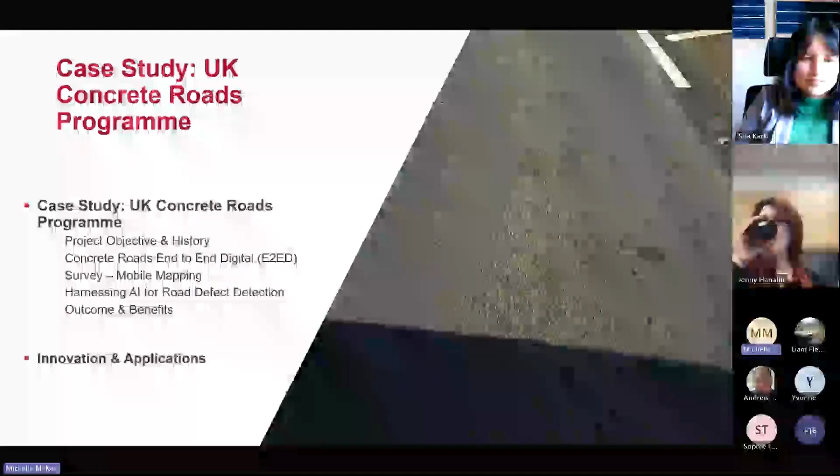So the case study I've chosen for today's presentation is the UK Concrete Roads Programme. We do have a lot of similar projects here in Ireland, but with many projects, we might be in the middle of the project, or customers may not want to share outcomes just yet, or they may want to keep some of the technology and developments in-house, whereas National Highways have kindly let us share the history of this project and their outcomes and the different technologies that they used.

So the UK Concrete Roads Programme, we'll go through a little bit of the objectives, history, the solutions that were used, the method of survey, which is mobile mapping, how we used AI for road defect detection, and the outcome and benefits, and then further innovation and applications with this technology. So this project was carried out on behalf of National Highways. There were a number of other consultants involved, such as AECOM and Mott MacDonald.

Ourselves and Korec were involved on the survey and analysis side of things, and then our sister company, K-Matic, provided the software and data management system and the AI learning for the project also. So a little bit of a background on the project itself.

National Highways manages England's motorway network, and about 4% of their network consists of concrete roads. They were coming towards the end of life. There was 400 million pounds set aside to manage and maintain, carry out repairs on these roads up to 2025. And a key thing for National Highways was to try and identify life extension schemes and reconstruction schemes. There was a huge area of roads that needed to be mapped, managed, analysed.

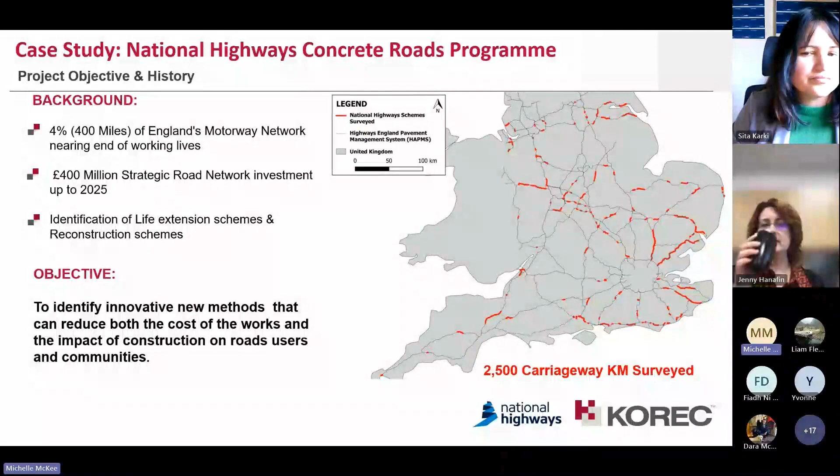They're dangerous carriageways, huge volumes of traffic, and then for reconstruction and maintenance crews to go back out at night time to locate these defects and problem areas in poor visibility conditions, often, due to various factors, works could not be completed, whereby maybe defects couldn't be located, they couldn't be accessed and things like that. So there was a huge amount of money lost through works that could not be completed or abandoned before they were finished.

So National Highways then undertook an evaluation of all of their digital technology to look at the various aspects of the road's life cycle, from the construction of the roads to repair to operation and to maintenance of the network. So they wanted a way to increase the productivity of the roads, increase the productivity of the crews. They wanted to improve safety for both their repair crews and for other road users.

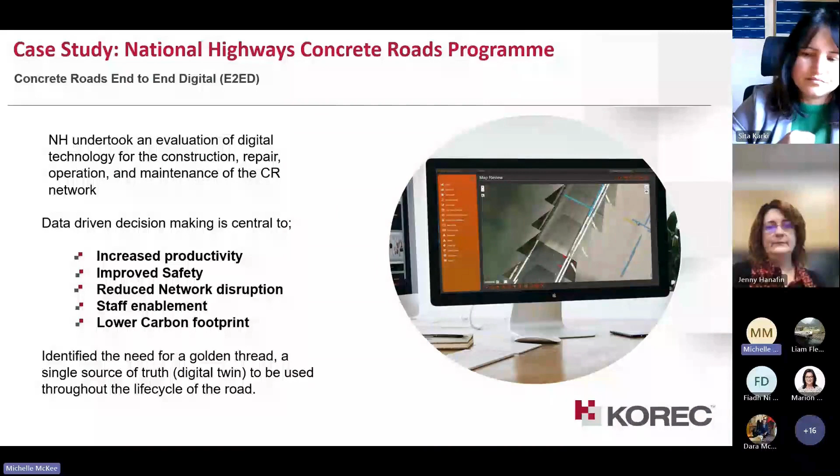They wanted to reduce the disruption to road users when they were carrying out these maintenance and repairs. They wanted staff to be able to make better decisions, and they wanted to lower their carbon footprint. So again, what was identified was the need for a golden thread to link everything together, or the digital twin, as we like to call it these days, and for that to be used throughout the life cycle of the project.

So surveying used to be a very manual process, with crews actually needing to be on the ground to carry out their surveys. Again, on busy roadways, this would require traffic management, would require roads to be closed. So we were looking at ways to automate this process and to capture information remotely. So in comes the mobile mapping system.

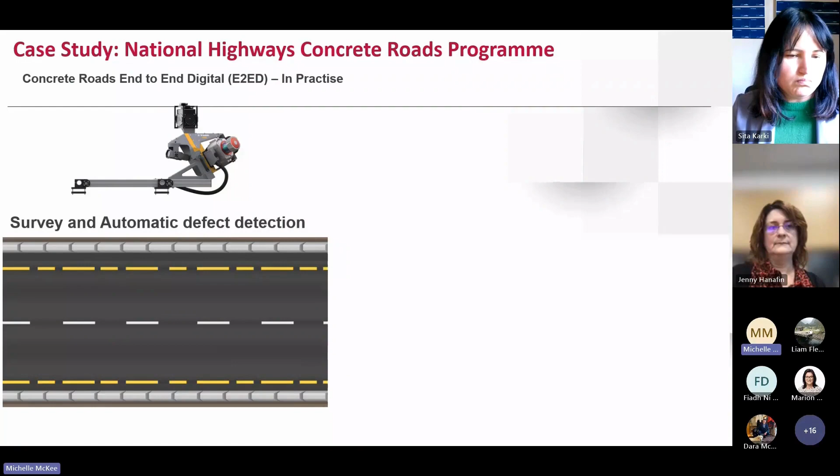So the mobile mapping system was developed whereby we can install this unit on a vehicle, and the vehicle will drive the roads and carriageways at normal driving speed, thus reducing the need for people to actually be on the road network. Again, it captures information, point cloud information, and really high quality imagery.

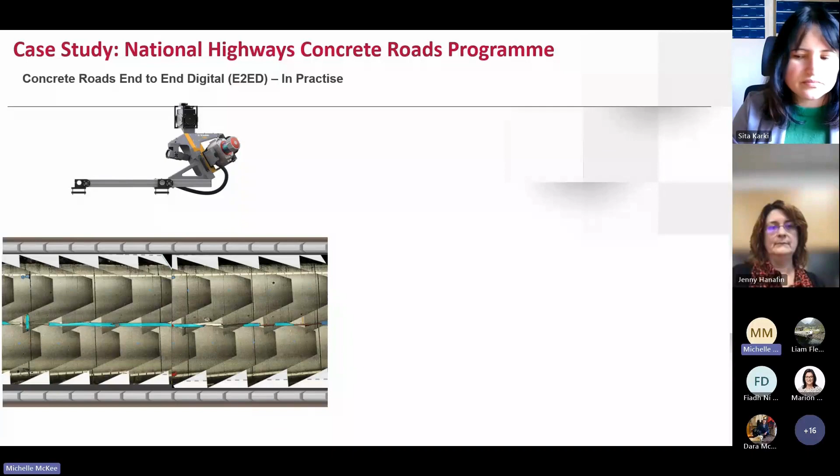Then when this information was captured, the information is not easily managed, I suppose, for many organisations, as traditionally you would have needed specialist software to view the point cloud information and to work with them. Many of these softwares would have been quite expensive, so it would have limited the amount of people that would have had licenses for this. It also might have required some specialist training, which again isn't practical for all of the people who would like to be able to use this information.

So in came the Klearview 360 platform. So this was a platform developed by our sister company, K-Matic, who developed web-based portals to allow you to store large volumes of information. So this meant that immediately you had a place to host this information, and it wasn't stored on National Highways network or servers, and a large number of people could access the information when they needed it, as only your web login was required. So this allowed people to work remotely, to be based all over the UK, and to be able to work with the same data sets all of the time.

So from there, all of the stakeholders could access and use this information to make better decisions in terms of managing the road network. Defects then could be obtained with very precise location data and can be fed back then to repair crews out on site, so that they can navigate to them within a centimetre of the actual location.

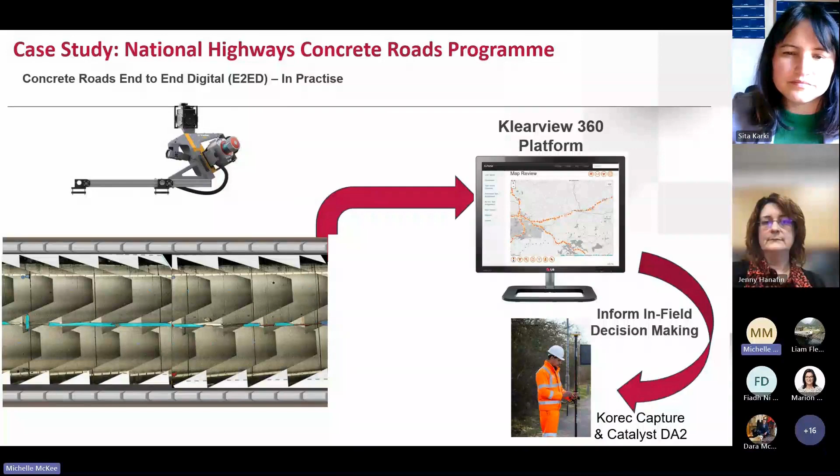This meant that the repair crews now had less abandoned works, and equally when the repair crews carried out defects, they could send the information live from the field back up to the Klearview 360 platform, and straight away any of our project managers or technicians could see what works have been carried out and what works were left to be done.

So a little bit more on the mobile mapping system. On the top of the unit there, you can see the 360-degree Ladybug camera. So this takes images in 360 directions. There's also cameras mounted on the side of the unit, which will capture information maybe lower down in the carriageway at an angle. And then there's a further camera, which is pointed down at the road surface at all times. So that captures really high quality information on the surface of the road.

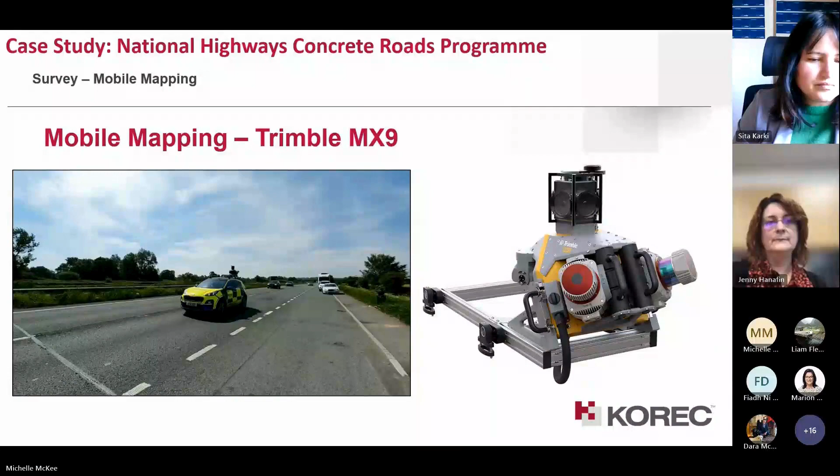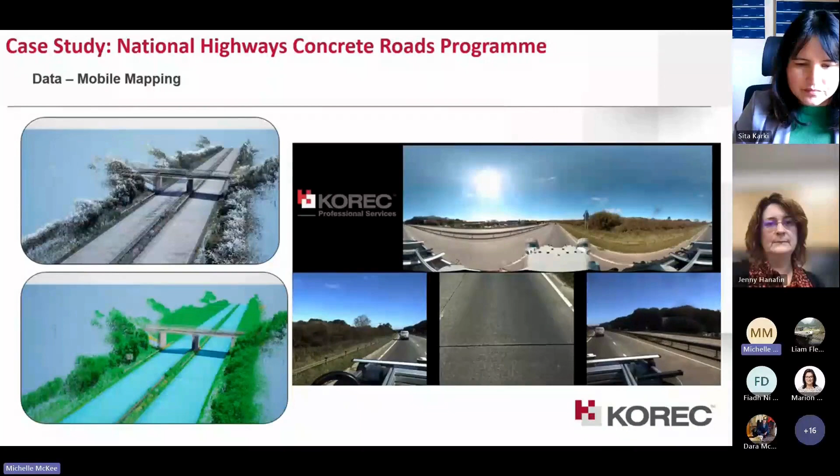Then up on the right hand side, you can see some of the information then from the different cameras. So the one on the top there is the Ladybug camera. The one down on the left will be the kind of side view cameras. And then in the middle, there's a down-facing camera that identifies the defects on the road.

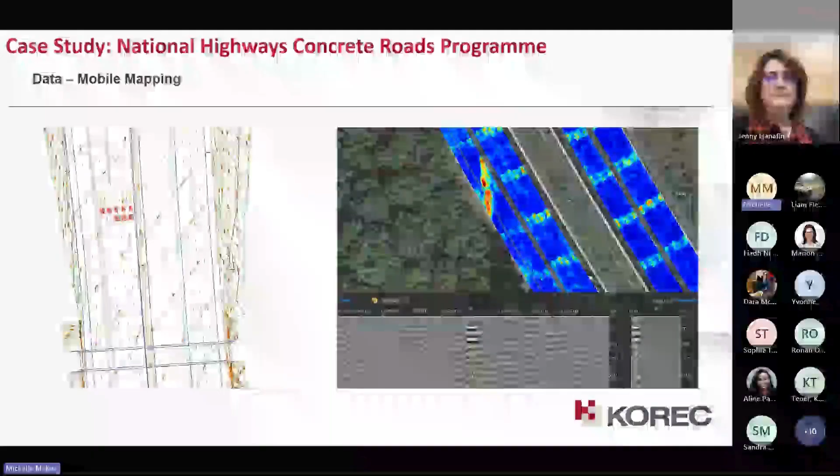So when this information then is looked at in various different softwares, you can see the graphic on the left will show you the point cloud of the survey of the road. But you can overlay that with different things like the design drawing that the consultants may be working with. There on the right-hand side, you can run routines as well that will analyze the surface of the road in detail. So what you're seeing there on the right-hand side is areas where there's a variation in the road level surface. It's probably hard to see, but just on the little graph below, it can give you a cross-section view of the level of the road.

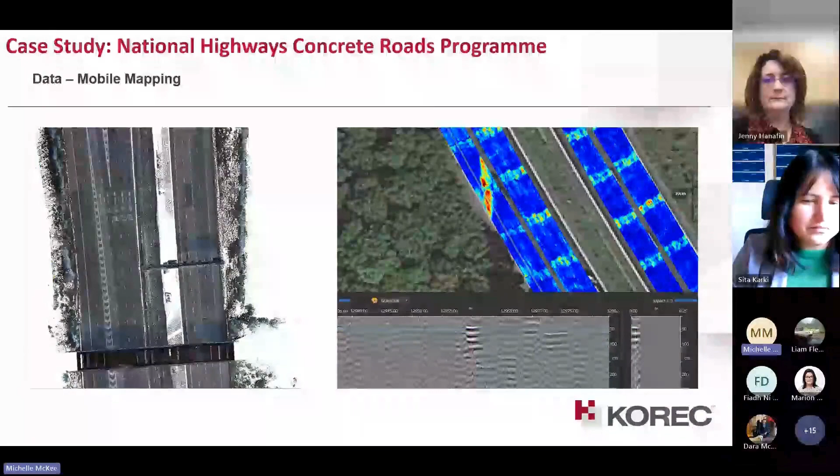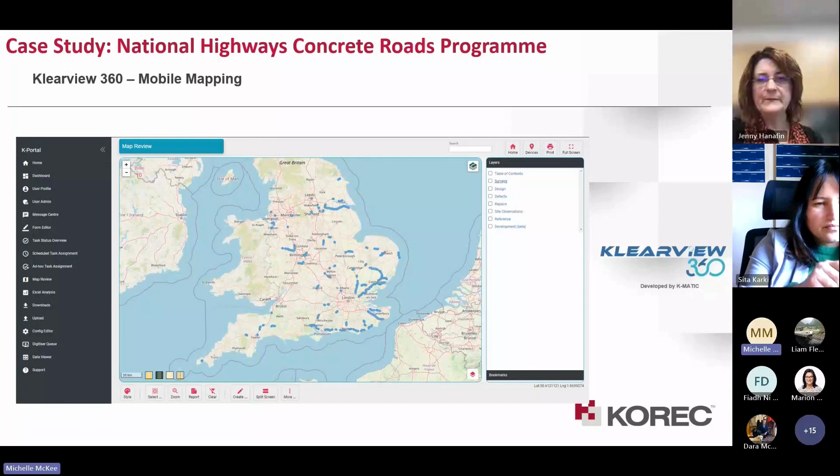Then what does the information look like in the portal? So this will be the standard view in the portal, which allows the different stakeholders to identify different areas which have been surveyed. So for anyone from a GIS background, this looks very familiar, with your ability to switch on and off different layers, to have existing data sets from previous surveys available to be able to overlay on your new surveys.

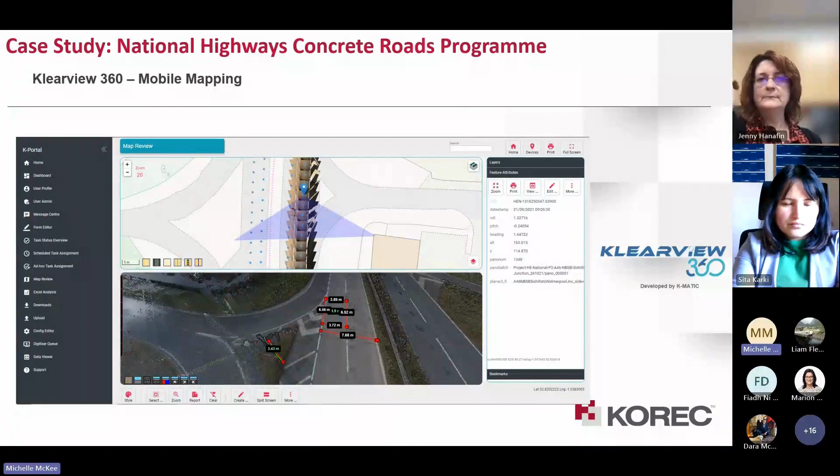So you can see there, the user has taken measurements of the carriageway. It can essentially survey the road remotely. So instead of having to carry out your survey out on site and pick out all of these defects on site, someone who is sitting at their laptop, hundreds or thousands of kilometers away, can actually carry out the road survey. So again, that's just showing you some of the different types of information that can be overlaid in the portal. So then, once defects are identified, they can be drawn up in the portal, and all of these data sets can then be exported, and the location of the defects then sent to the field repair crews.

So for many previous projects, we would have done all of this kind of manually, where you had a person that would sit down and go through hundreds and thousands of kilometers of road data. It was quite a laborious task, so it required a huge amount of manpower hours. So wouldn't it be great if this could be done automatically?

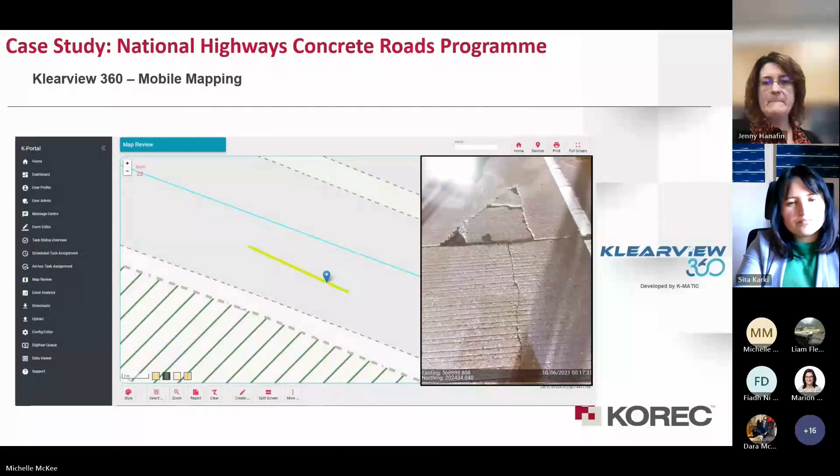So that just gives you an example there of various defects, let's say, that the end user would see as they pan through the photography, and then how they would kind of draft them up within the K-Matic program. So again, you can identify areas on polygons, etc.

So to bring our solution on from this, we kind of moved from manual survey to automated survey methods by using the mobile mapping system. But again, this manual analysis was the thing now that was eating up everyone's time and could delay the project significantly. So again, we needed to find some way of automating this analysis.

And with the developments in machine learning, this suddenly allowed us to do this in great ways. So with our K-Matic team, we have some in-house AI machine learning specialists, and they were able to create an AI tool to actually automate this whole defect analysis. So the AI can be applied to many different types of data. The AI could look at the imagery, it could look at the point clouds, it can use shape and spatial data, and it could also use tabular data.

So the first part in the process was looking at our existing data set and doing some labeling of the data to identify the different defects in this case that we wanted the algorithm to look for. The next part of it then was training the model, which my colleagues in the K-Matic department looked after. Unfortunately, I have no background in this myself.

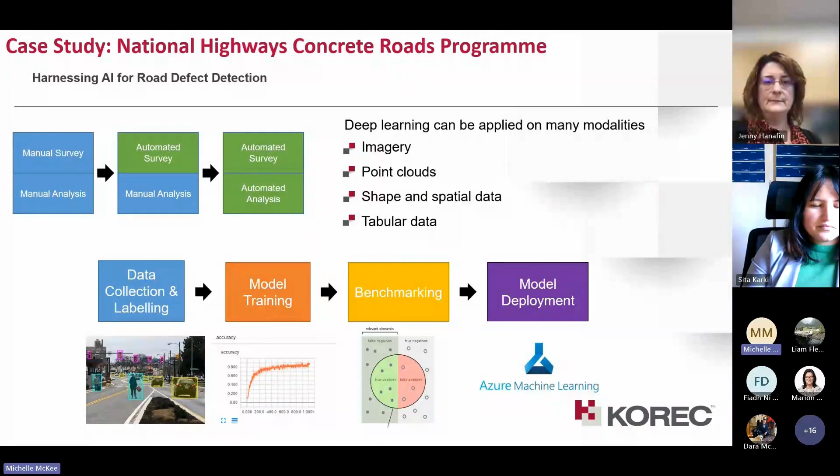After a number of weeks or months, the AI model would have run through a number of benchmarking processes to ensure that the model was identifying defects correctly and up to satisfactory standards. And then once they were happy, the model was deployed within the portal to start carrying out this automatic defect detection. So by using AI, we were getting centimeter accurate analysis of the road surface.

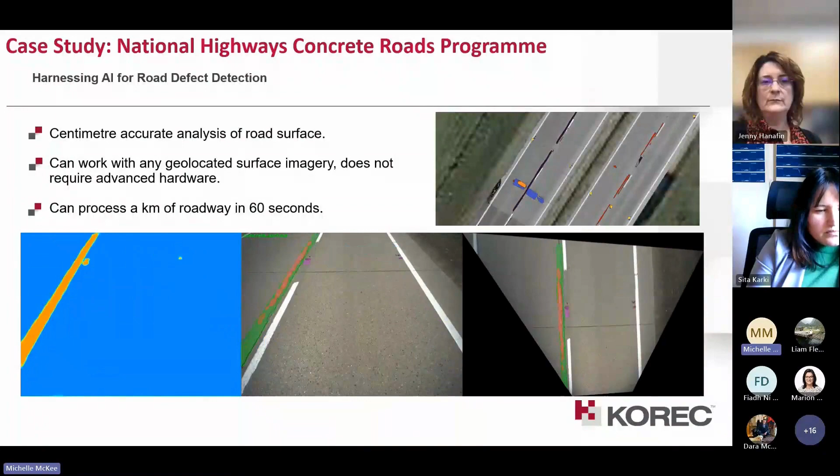And AI can work with any geolocated surface imagery. It doesn't require advanced hardware. It also didn't require us to share our information with anyone. All of this can be done locally within your own project. And the huge benefit to us was that AI can process a kilometre of roadway in 60 seconds. So just looking at the imagery here, these would have been defects that the AI tool actually identified and highlighted, and all of this was done so quickly once the model was well established.

So the outcome and benefits of this project was that it reduced boots on the ground for traditional surveys and inspections. So it allowed us to create digital twins of the roads that can be used by people remotely. So it reduced the cost of works. It also minimised the impact of construction on road users and local communities, which is a huge cost saving to the entire economy, and reduced the risk to workers on site by being able to survey the roads remotely.

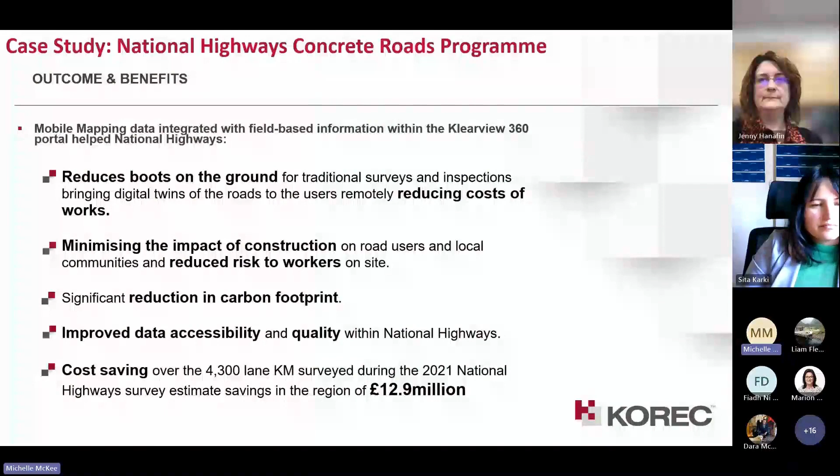There was a significant reduction in the carbon footprint, and it also improved data accessibility and quality within National Highways. We now could have numerous stakeholders able to access the information very easily via the web portal. The cost saving to National Highways, they calculated, was 12.9 million on that particular project. So well worth the investment in developing these new technologies.

In terms of innovation and applications, these kind of solutions are already used in Ireland for fibre, utilities, rail, gully and canopy. There's many people out there that are already using their own bespoke machine learning technology. And what we're looking to do is to empower people with next generation solutions that unlock the potential of geospatial data. And so really with this, there's no limit to where it can go in future. And hopefully we'll have some nice projects we can present on later in the year as well.

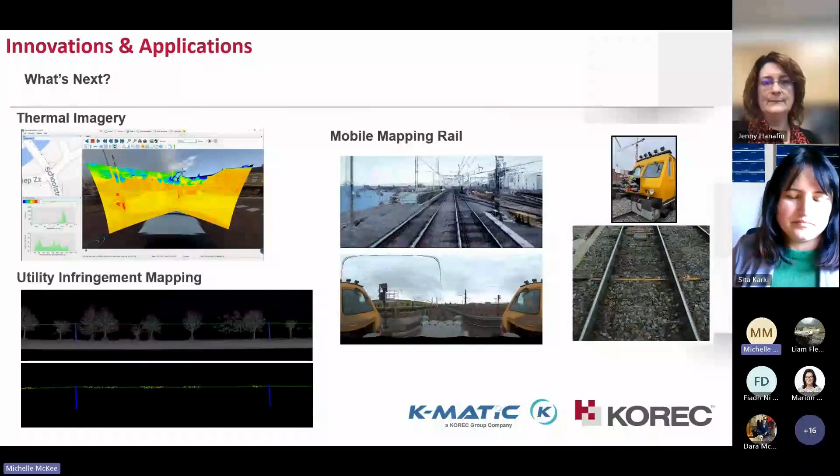That was terrific. And you answered my question, which was whether or not AI could help with your analysis. It looks like it's done very effectively. Yeah.